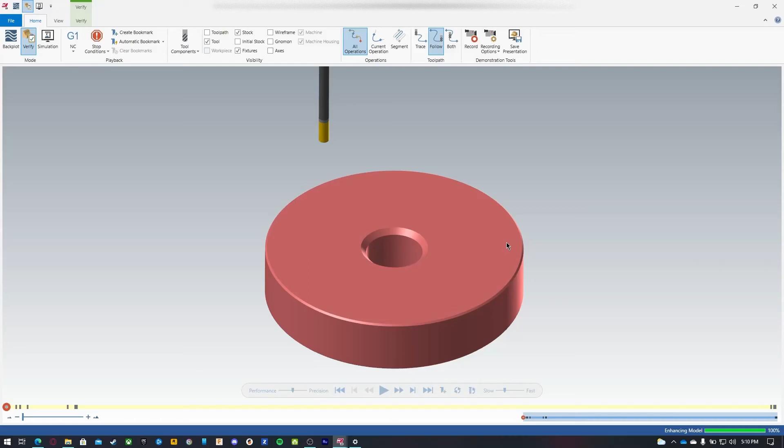I'm going to show you guys how to start out with a solid blank of pre-machined material. We'll do some Transform Toolpaths and some thread milling, so stay tuned.

Let's go up to our wireframe, and I'm going to select a circle endpoint. My diameter will be 4.75, and I'll press enter. Then I'll just press O, or you can click up to auto cursor and click origin.

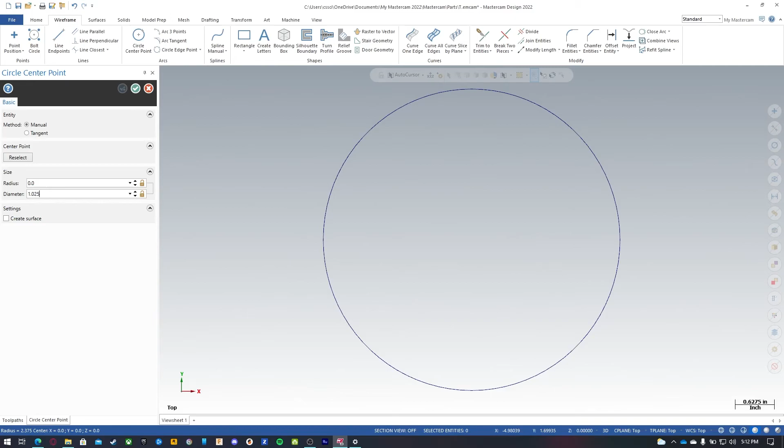My next hole I'm going to build will be for a 1 inch, 1 1/8-12 UNF thread. So I'm going to punch in 1.025, press O again to get that to center, and click OK.

So now I have my blanks for my material. I'm going to go up to solids and click on extrude, and select both of these circles. I want to extrude this so that it's 1 inch exactly, but I want to make sure it's below the Z level.

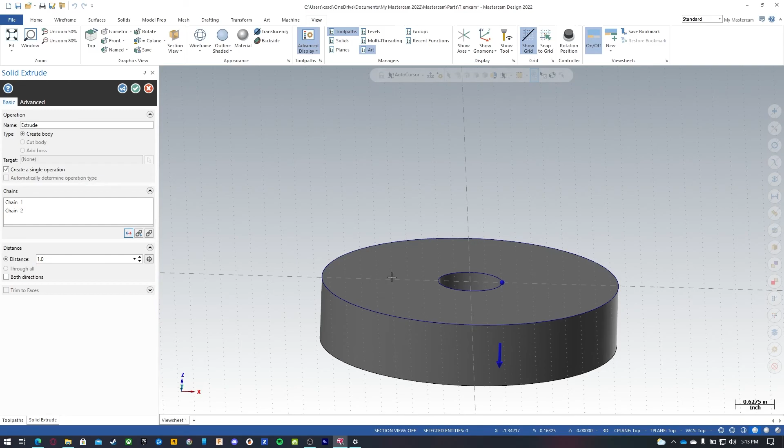So I'll go to view and put on show grid. This is showing that it's above it, so I'm going to click on this reverse all button. Now everything comes off of Z0. Click OK, and I want to throw on some chamfers on this.

So we'll go back to solids, go to one distance chamfer, and I'm going to uncheck these two boxes, so now the only one selected is edge. I'll click on these two edges, and we're going to set these at 0.0313.

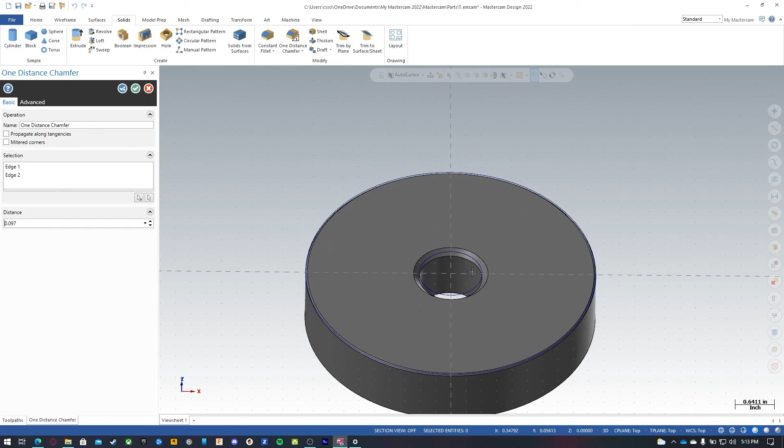I'm going to create a new operation and do the inside bores. These are going to be 97 thou. Now I'll click OK. And if I wanted to hide these, I could put them on a different level.

So let's go to View and go to our Levels button. Now I have my Levels tab for down here, this Levels Manager. I'm going to name this Solid, and then I'll create a new level, and this will be Solid Geometry.

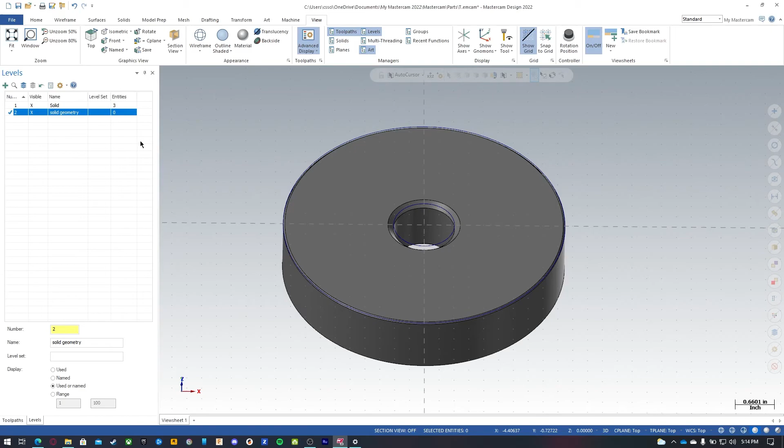Now I'll click on these two lines or wireframe, then right click, and down here it says change level. I'll click on that and click on move. Now I can highlight only my solid, and that geometry is hidden for using later.

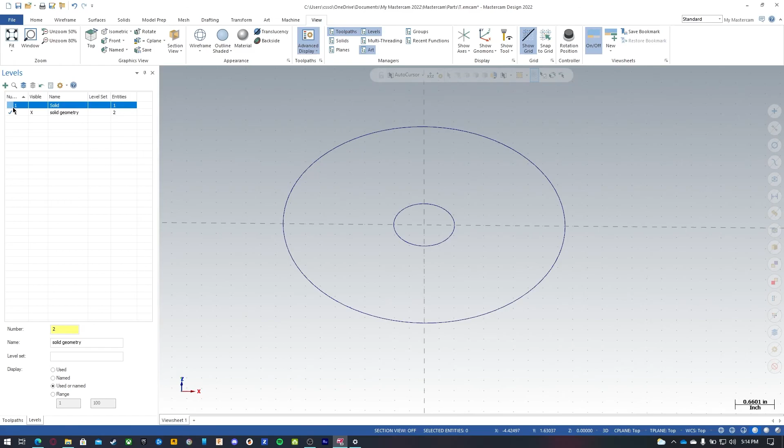You can also have both showing and click on your solid and then go to hide or unhide, and that will hide anything that's unselected. I'm also going to create a new tool level where I'm going to call this wireframe, top wireframe.

Now let's go back to our Toolpaths tab, and we don't have anything in here. So I'll go up to my machine and select Mill Default. I'm going to click on Stock Setup.

I want to click on my solid mesh, and I'll select the new solid we've created. So now this allows me to use this as my stock, since it's already pre-machined on the lathe.

I'll go back into tool settings, and I want to make sure that my assign tool number sequentially and warn of duplicate tools are available. Now I want to create my top wireframe geometry.

I'll go up to my top view, and I can hide my wireframe or my solid. I'm going to use only my top wireframe, and you can see how these X's will show. The active level is going to be the one that has a check mark, so I'm going to unselect those.

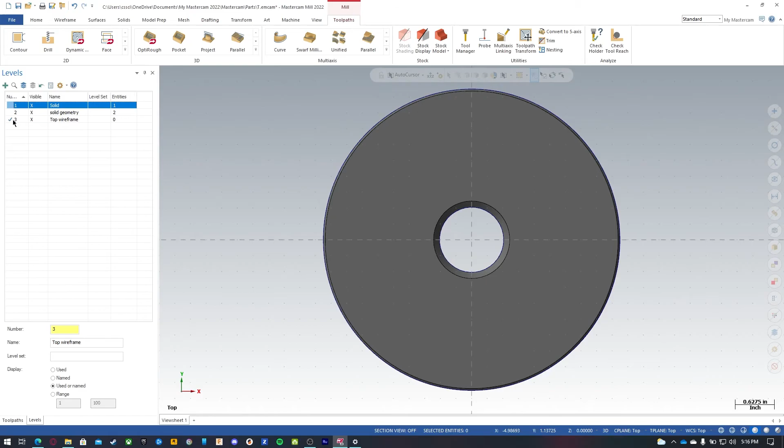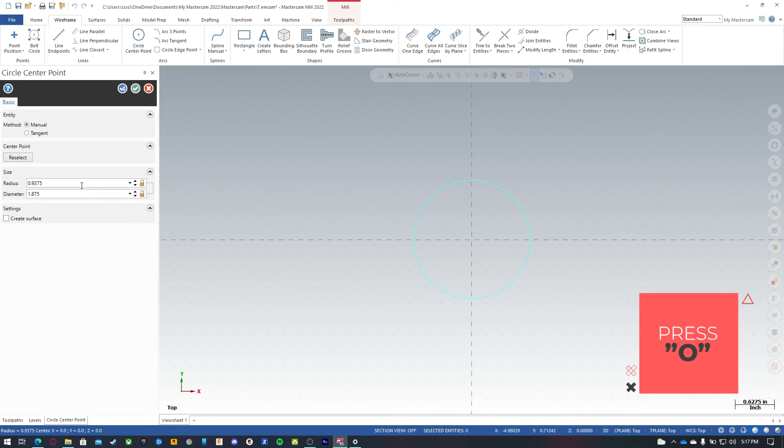I'm going to go to my toolpaths, and let's start creating our wireframe. First thing I want to do is specify a radius of 0.9375, and I'm going to put that on the origin. Create another one, 1.4375, put that on the origin as well.

Now everything is going to be working off center, and 1.9375 will be our origin once again. These are going to be 1/4 tapped holes, so I'll specify them as 0.25.

And I'm going to lock this button, so now it constrains it. Now I want to try and click on these lines, except it's not going to select.

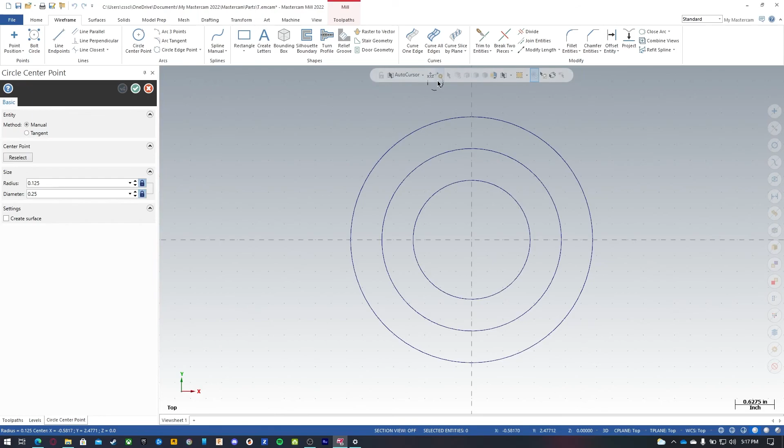So what you can do is click on your selection settings and pick the quadrant option, then click OK. Now it'll ask you if you want to save, and now I should be able to select each quadrant. Now I want to put one on each of these, and I'll click OK.

Let's click on the Transform tab. Now I want to move some of these circles, so I'm going to go up to Rotate, and I'm going to select this one only.

Now I want to set this at 18 degrees, and I'm going to increase this by 1, 2, and 3. Okay, now I'm going to move this, so that gets rid of the one that I had prior.

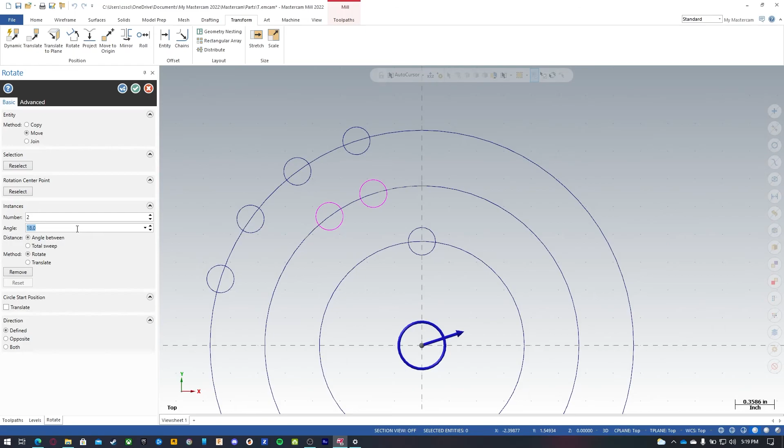I'm going to click OK, select the next one and do my end selection. I'm going to select 2, and these will be 30 degrees. Click OK, end selection, and do another one: select 1, and this will be 45 degrees. Now I have all my holes set in this quadrant.

We're going to have 4 holes, or 4 sets of holes all the way around, but we'll use a Transform Toolpath, so we're only going to do 1 quadrant. I want to build a slot on this section here.

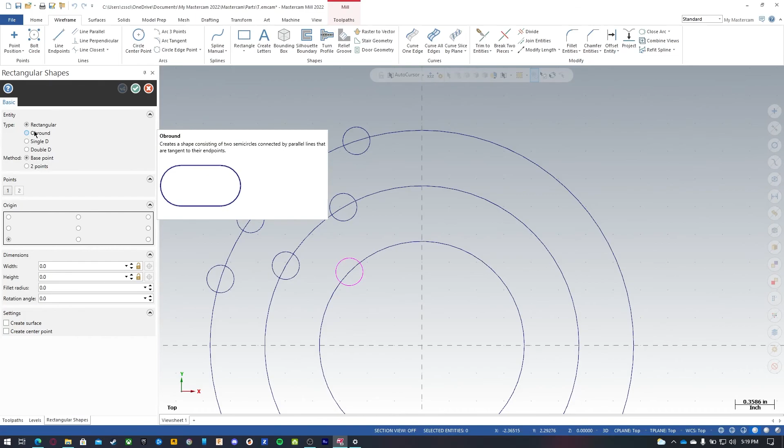So let's go back up to wireframe, and I'm going to click this little drop down below rectangle and click rectangular shapes. Now I can select obround, rectangular. There's many different options here, but the one that I want is obround.

I'm going to click on this top, actually let's click on the middle one here. This is going to be the anchor point of where it drags. You click and you drag from that point, except I want the center of that slot over top. So I'm going to click on the middle one and drag it out.

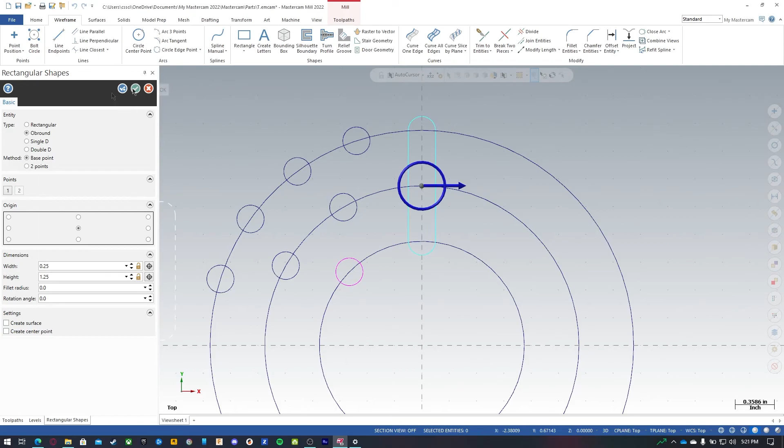You can see we haven't specified any options here, but I want this at 0.25 wide, and I want to have this 1 inch, but I also want to add a 1/4 inch, so 1/8 of an inch per side. So plus 0.25, and now you can see it spans over top. Now click OK, and that is my new slot.

So now I want to create some center drilling operations, but we're going to use a spot drill. Let's go up to our toolpaths, go up to Tool Manager, and let's create a bunch of tools here. What you select as your filter will appear down here. This is your library. What you can do is create tools and store them, and everything that you have here is stored for this particular job.

So I'm going to create a new tool in my library here. I'm going to create a spot drill. It's going to be a 90-degree spot drill, and we're going to do 375, so 3/8 spot drill, and we can specify our feeds and speeds here. Now I'm going to say that this is an aluminum blank that's ready to go. 0.375 divided by 150, we get a chip load per tooth and a feed rate of 61.

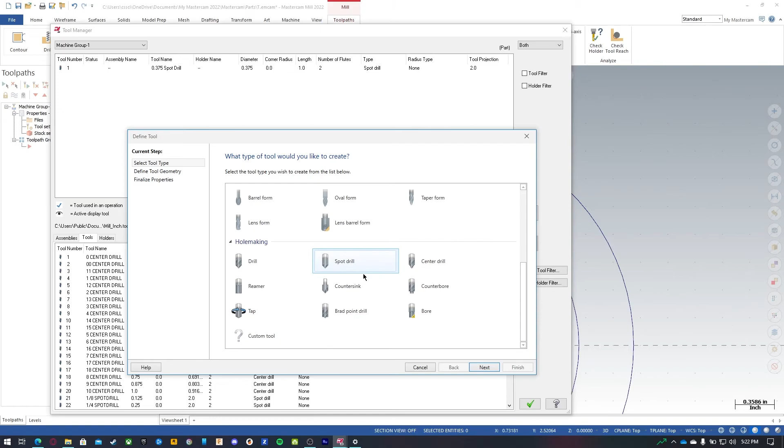I think most of these options are good, so I'll finish, and I'm going to create a new tool, and I'm going to find a drill. I'm going to change this to 0.201, that's the tap drill size for a 1/4 20 tap.

We can go to Next and set our feeds and speeds here, 0.201 divided by 150. Everything else looks good. Create a new tool.

I'm going to use a flat end mill. We're going to call this a 1/2 inch. Click Next, and we'll specify 1200 surface feet per minute again. 0.5 divided by 150, we have a feed per tooth, 4 flutes, and we'll click Finish.

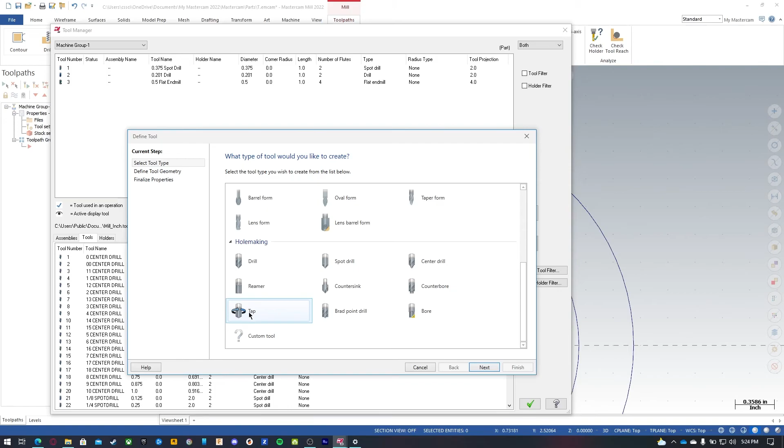Okay, so we're going to go down to Tap, click Next, and we're going to set this at a 1/4. You can also click these drop downs if you're not sure or remember the size of the drills or anything like that. So we're going to go 1/4. You can specify if it's a left-handed tap, but this is going to be a right-handed tap, and we'll use a plug.

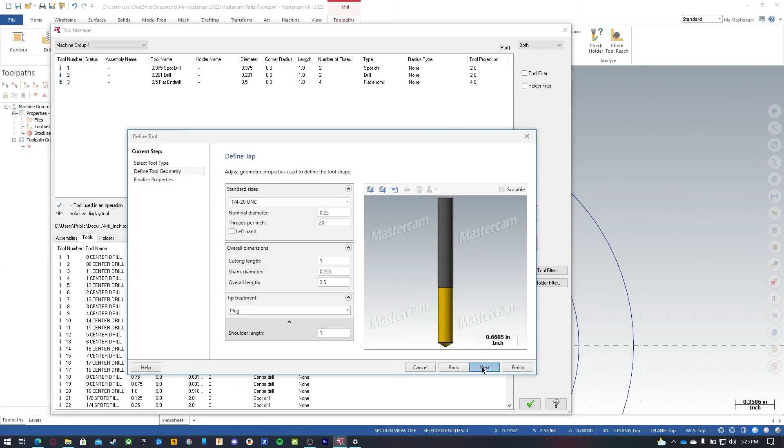So I wouldn't go much more than 500 RPM with the tap. The reason being is you need to have at least 3 times your pitch in order to accelerate and decelerate on older machines. Now this being 500 RPM will be able to slow down in enough time that it's not going to hit the bottom of the hole. But these are through holes, so we don't really have to worry about that much, but just make sure you're not going like 10,000 RPM.

So click OK. The next tool I want to create is going to be a thread mill, so that's right here. I want to create a unified national. There's going to be 12 threads per inch. The outside diameter is going to be 0.745.

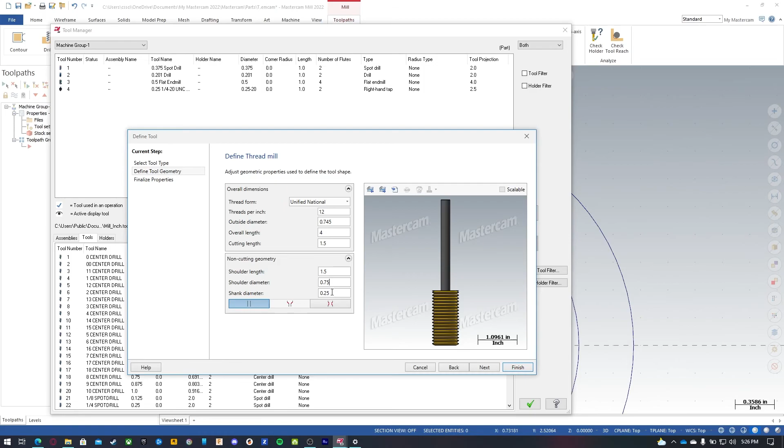Our overall length, we can specify this at 4 inches. The cutting length will be 1.5. Shoulder length can be 1.5. Shoulder diameter will be 0.75. Our shank diameter will be 0.25. So it's going to look like this.

We'll click Next, and we're going to specify our surface feet per minute at 1200. So we're doing aluminum, and our feed per tooth.

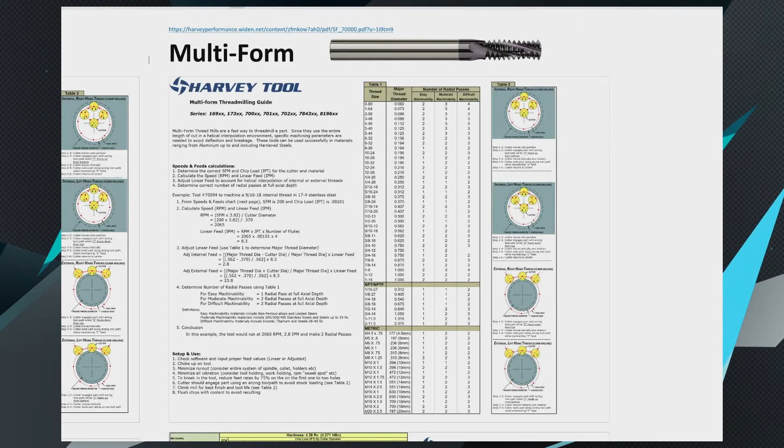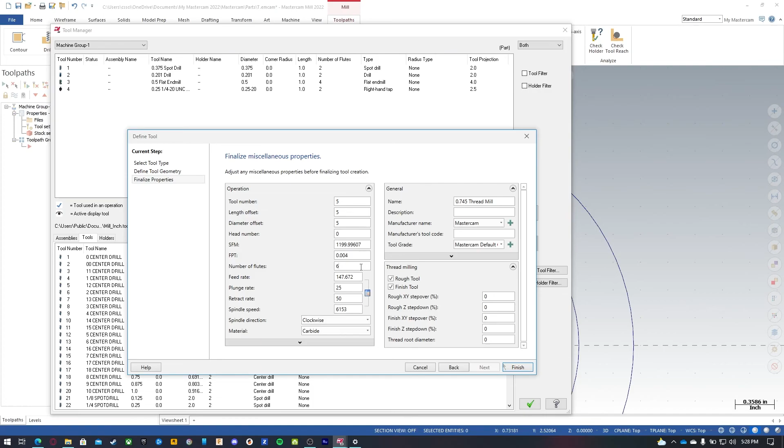Let's click Finish, we're going to create one more tool. We need a flat end mill, and we have to do that 1/4 inch slot, so we're going to set this at 3/16, so 0.1875.

And we don't want any corners. We're going to specify that this is carbide at 1200, and my feed per tooth, 4 flutes—sometimes you might have 2 flutes. Click Finish, and we are done setting up our tool.

So let's click OK. Now, first thing I want to do is maybe spot drill all of these holes. So if I go up to 2D, you can go to Expand Gallery to see more options, but I'm just going to go to Drill.

And I'm going to select these holes, and now you see how that has selected a quadrant. We might want to go back into these options and then press the Delete key to get rid of that.

Okay, so now we have sorting options as well. We can click the selected order, or we can specify zigzag. Doesn't much matter, it's not going to be crossing a whole lot of things. It might come in handy when you're trying to jump over a wall.

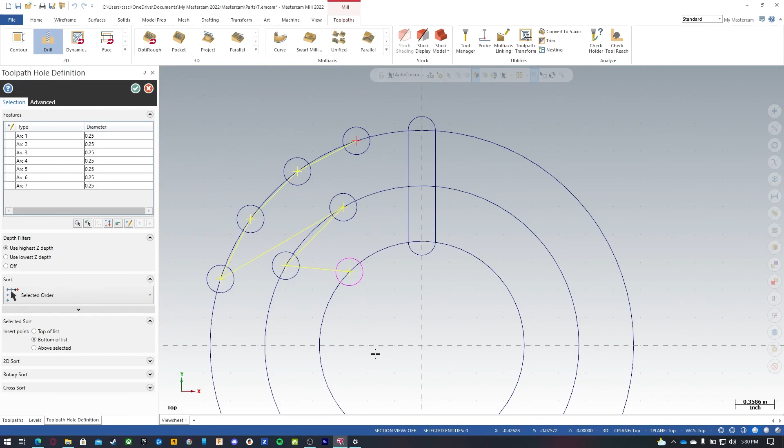So whenever this is picked, or you can even do a window selection, so if I wanted to click and drag, I can have my points selected in the selected order. So I'll click OK.

And I'll go to my tool, and let's select the 3/8 spot drill. We have a spindle speed.

Now this is dependent on your machine. But I'm going to go down to my cut parameters, and I want to drill and countersink these holes in one shot, so I'm going to leave this on drill counterbore, and I'm going to add a dwell.

I believe this is in milliseconds. I'm going to go to linking parameters. I'm going to set my height to 2 inches, absolute.

I can use my clearance at the top, start and end of the operation, and this just allows me not to retract up 2 inches in between each hole. It just does it on the first and the last one.

My retract, I'm going to specify at 0.1. My top of stock is 0 because this is already machined. And my depth—now I'm going to set this at absolute, and I want a finish diameter of 0.375. So I'm just going to click OK.

So that is the total width of my spot drill. Now I can lower it by 1 thou or whatever just to get it accommodated, or use a larger spot drill.

I'm just going to check my planes, make sure it's all set to top, and then make sure I have my coolant set on. And I like to save my parameters so that I don't have to set these options again. They're all fairly close to the defaults.

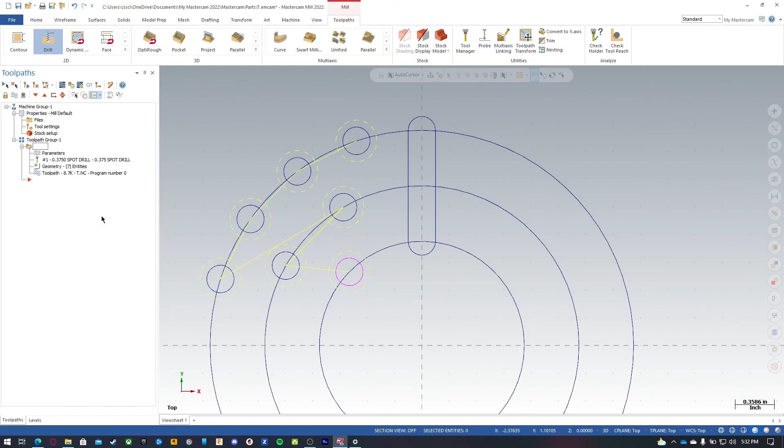Now I want to drill out these holes, so I can just copy and paste this operation. And if I also want to set my comments in here, I can go back into Tool, which we have to go to anyways to select our drill. And we'll make sure that it uses the right feeds and speeds.

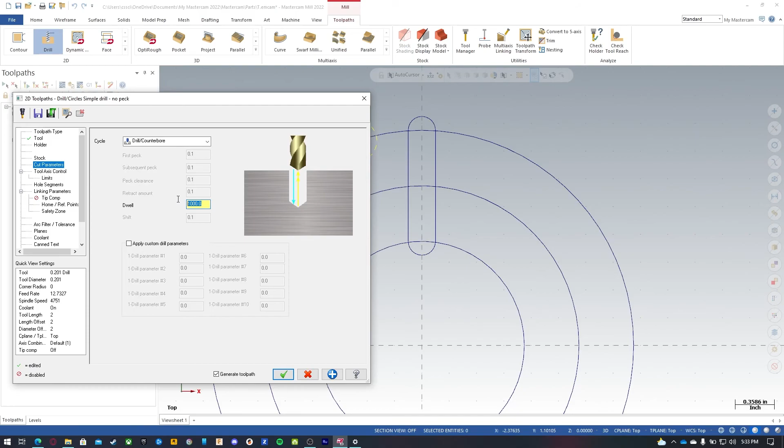I'll go to my cut parameters, and we're just going to drill right through, but we don't need a dwell, so we'll turn that off.

We'll go to linking parameters, and I want to specify the depth of my hole. So I know that this piece is going to be 1 inch exactly, so minus 1 inch. Now I like to have a little bit of breakthrough, so I also put in minus 0.05.

And I also have a tip comp, so this is going to be tool 1. That will give you the actual tool tip length, or the point. So then I should be alright to click OK.

Now if you wanted to verify, you click backplot here, and I'll go to my backplot, and it shows me that I'm drilling in and I have a bit of a chamfer, which is great.

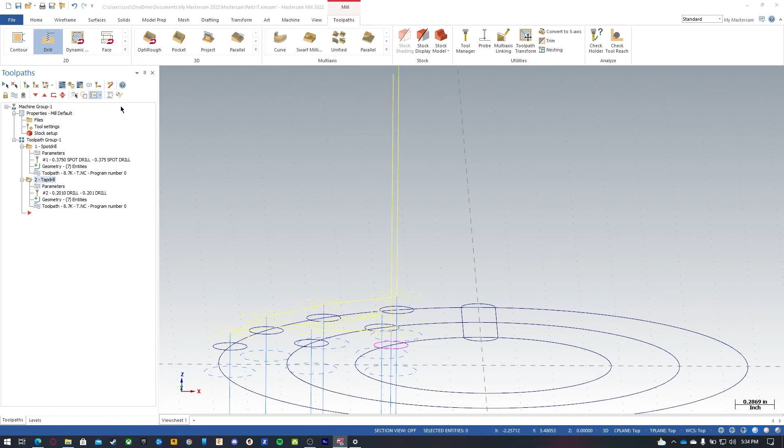Okay, now I'm going to hit escape and go to my tap drill and check the depth of this drill. Now it also says that this is my total depth down here, so I'm going 1.104.

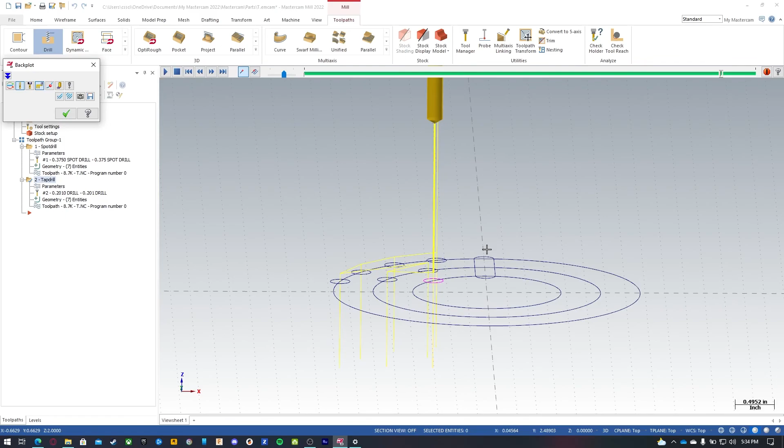Okay, and then it's rapiding over, and it's not doing a full retract into the very last hole, and then it's done. So those look good. We've got our spot drill and our tap drill done.

Now we just need to tap them. So I can just copy this once again and paste it. I'm going to go up to my tool and select my tap.

1/4-20. We're going to specify this at 500 spindle speed, so not surface feet per minute. We have a feed per tooth of 50 thou, that's our pitch. So we're just going to tap this, and we'll go up to cut parameters and specify our tap function.

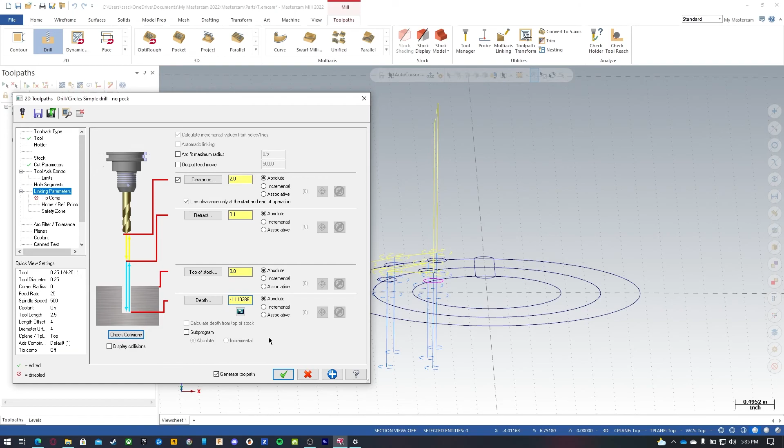Now our linking parameters, typically we can just go about the same as the drill because the point is going to be compensated as well, or if you wanted to go a little bit deeper, that's fine as well. I'll just leave it as is. So click OK, and now we've got a tap.

So now if I wanted to backplot this, I would be able to see my tap, my drill, and my spot drill. So I'll back it up, and I'll turn on my stop conditions.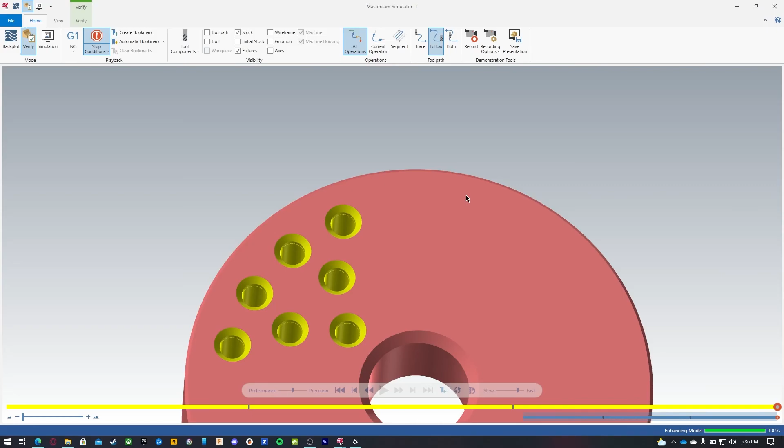Now I'm going to spot drill, and tap. And that gives me my chamfer in the one shot, which is awesome. I'm going to click close, and with this, I'm going to do my slot now.

So I probably want to go into contour, and I'm going to select this chain at the base over here. If I select it over here, it's going to go the incorrect direction if I wanted to climb mill. So I'm going to, if I press R on the keyboard or press this button, it will reverse it so it climb mills.

But I want to have it arc in at the middle of that line, so I want to have my base point selected like that. I'll click OK. I'm going to go to my tool and my 3/16 flat end mill.

So if you have a 24,000 RPM spindle, that would work. If it caps out, make sure you drop your feed rate. So let's say if you capped out at 6,000 on a certain machine, you would have to back your feed rate down. Otherwise, you're going to end up breaking your tool.

This is going to ramp the slot. Go to our cut parameters, and I'll specify ramp. I'm going to do a depth, and make sure my pass is at the final depth. And I want to go maybe, let's go 0.093, so that's half the diameter of the cutter.

So if we're slotting, I like to turn off linearized helix because it doesn't work all that great on older machines. It spits out too many points and then it starts to jitter. So if you have a newer machine and it does points very well, linearized helix is pretty decent.

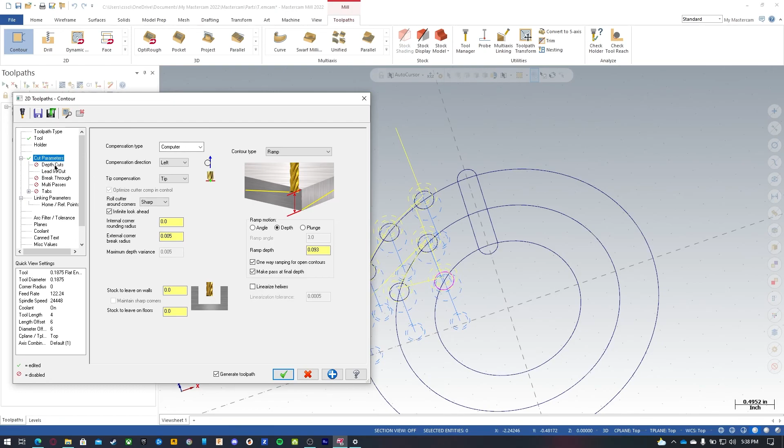I'm going to leave depth of cut off, turn my lead in, lead out to probably 10% on both, and then copy the options over to the other side. I'll go to my linking parameters, and I want to specify my total depth at minus 0.437. So I'm going to click OK, and let's take a look at this.

So it's going to ramp it out and do a final pass at the bottom.

So now that we've got those tool paths done, I want to copy them around 360 degrees. So what I can do is make sure you have these check marks on each. So if I just click on Toolpath Group, now I can just right click and go to Mill Toolpaths and click Transform, or I can go up to here and click Transform Toolpath.

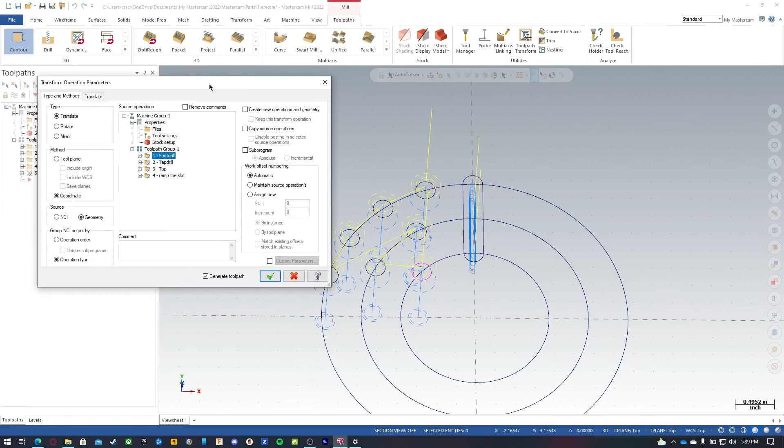Now I want to rotate these around the center. I want to have all of these operations selected, and this group NCI output by operation order, this is going to spit out a center drill, then a drill, then a tap, then a slot, and it'll do the same in that order on each quadrant. So that's a lot of tool changes. But if we do it by operation type, then that will do center drill all the way around, then drill all the way around.

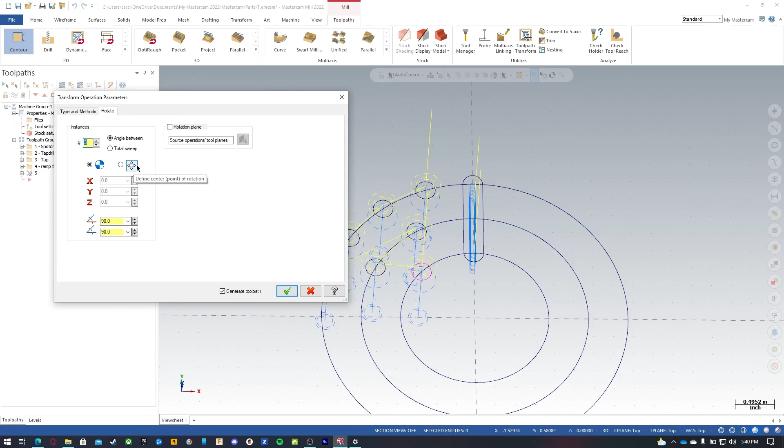So I'll click on rotate. I have my origin already selected, but you can change it here. I'm going to do an angle between, and I want to do 4 angles of 90 degrees. I'll click OK and generate my toolpath. Now if I have my button here selected, only display selected toolpaths, I click on this one, it shows me that I'm going around all the way.

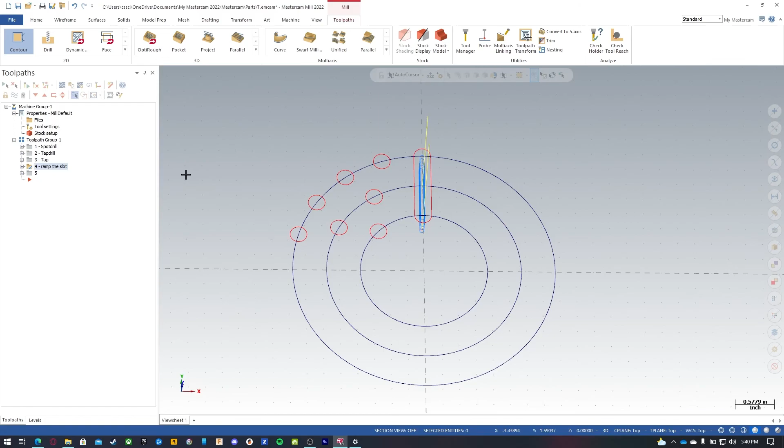Now if I select on these, this shows me that I have just those ones selected. You can do a couple of different options: specify only 3 rotations and use the existing operations, or maybe ghost them. And then I like to put them in a folder, so new toolpath group, don't post, and then I'll take these and put them in here.

We'll regenerate. So then when I go up to my back plot, it does all of the operations. It spot drills all the way around, drills all the way around, goes and taps, and then it slots out. Now I might want to also do a countersink on my slot here.

So what I'll do is I'll create a new contour program. I'll select the same contour, and I'm going to select my tool, my 3/8 spot drill, call this chamfer the slot. I'll put this at like 40 inches a minute.

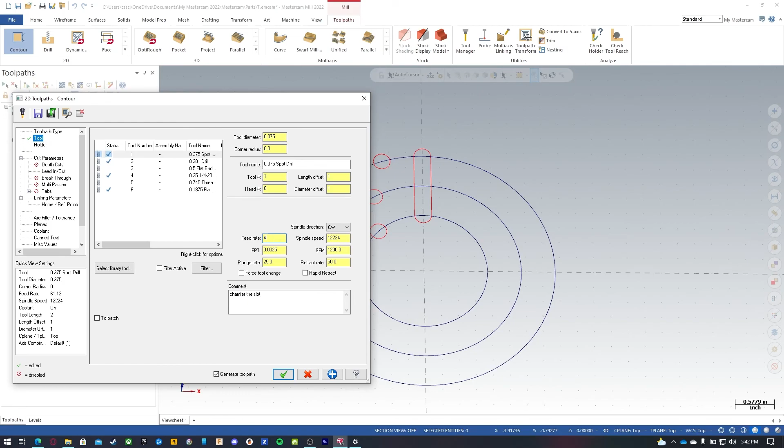And I will change this to 2D chamfer. I'm going to put this at 0.0313, with a bottom offset of 100 thou. You can specify it at 50 thou if you really wanted, but this should be sufficient enough. I'm going to make sure I've got 10% lead in, and my depth is going to be 0. So this is going to show me that my lead in and lead out is not going to violate anything.

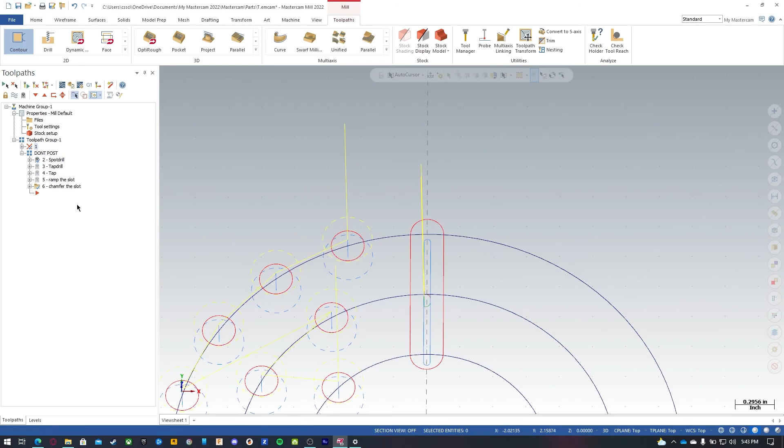And now if I wanted to, I would put this at the bottom. You just click and drag it, so let's say if I wanted the spot drill, well, I don't want it at the bottom, I want it at the top. So I would hold it and drag it to the spot right above it. Okay, so regenerate, and I'm going to add my parameters, and add this. So we're going to close the don't post and verify it. So I have my spot drills, my drills, tap, slot, and then we got our chamfer.

So I'll name this top side, and I have to create some lines on this part. So I'm just going to select contour, and I'm going to select these circles just like that. Click OK.

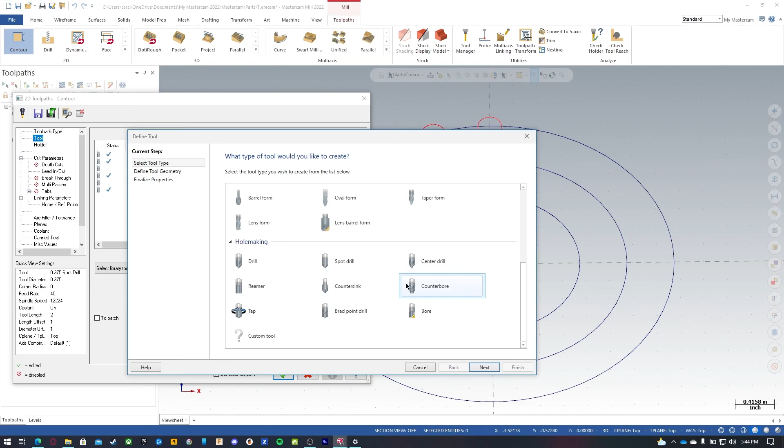And I need one more tool, so I'm going to go to Create Tool, and I'm going to pick a spot drill. We're going to call it 90 degrees, and we'll do 1/8. We'll click Next, set our surf speed, and we're going to click Finish.

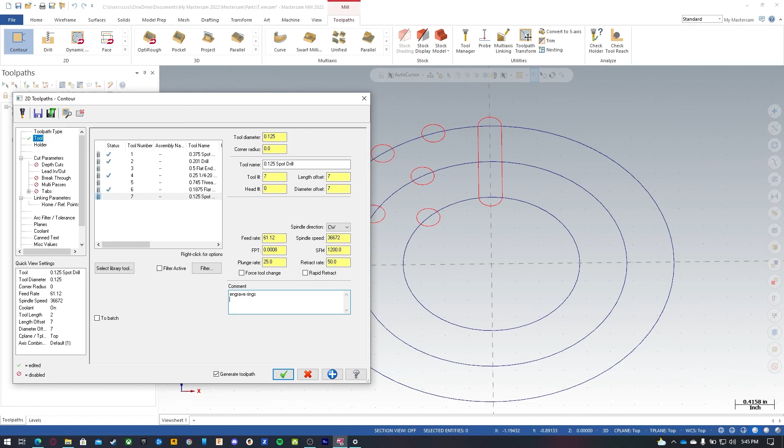So this is going to engrave rings. I'll go to my cut parameters, and I want to set this to 2D, and I want to turn my compensation off so that it will engrave directly down the center of those rings. I'm going to set my depth at -0.01, so we're going in 10 thou.

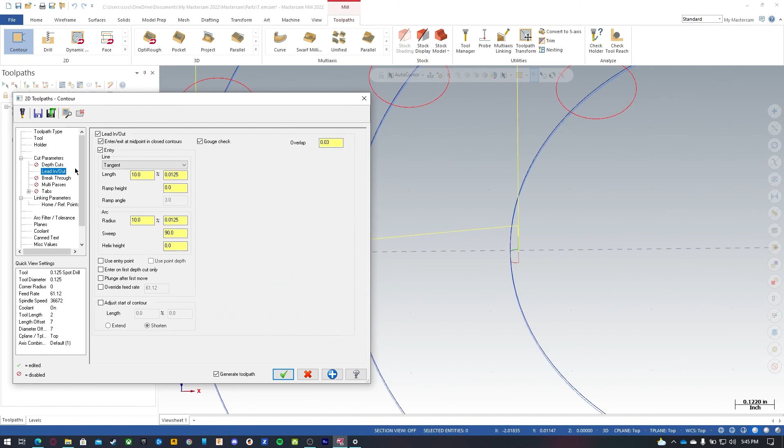So click OK. And you see there's lead in and lead outs? That's going to affect what it's going to look like. So let's go back in and turn off our lead in and lead out. If we just turn that off, click OK, now it's not going to escape our lines. So now we'll post it, and we'll just zip right through, and there's our lines. So now we're done, so we'll just click OK.

And we're going to create a new toolpath group. I like to click on machine group so then it doesn't go inside of top group. So this is going to be bottom side. And I want to go to my view, and I want to open up my planes. I'm going to right click on my top plane and duplicate it, and we're going to call this bottom side.

Now I want to drop this by 1 inch exactly. And I also want to rotate incrementally either the X or the Y, it doesn't matter, because this is a round part. And I want to have it so that my Z is pointing downwards. So click OK, and then click this equals button to get everything to where it needs to be.

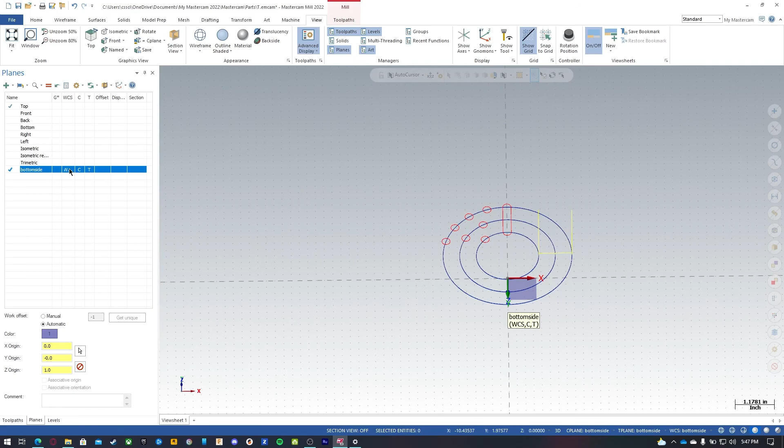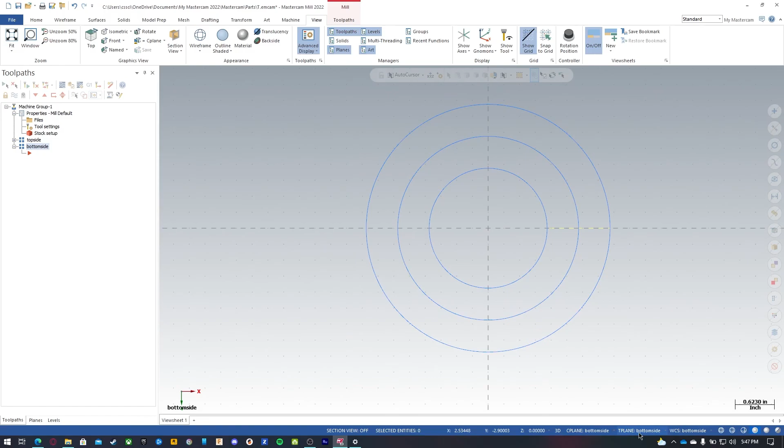So now if I go to my toolpaths, we are ready to do the toolpaths for the bottom side. I'm going to go into my planes and levels and do another level, and this will be bottom wireframe. I'll disable my top wireframe and go back to my toolpaths, and right click and go to top. Now as long as these are set to bottom side, you will be in the right spot. And I'm going to turn off these toolpaths.

Now I want to create the inside pocket of this base plate. So I'll go up to my wireframe, click on circle center point, and punch in 4.375 and press O. Click OK, set my 1.5 circle, and then press O. So now I have these two circles, and this is going to be used for my pocket.

So what we've done is we've taken our part, finished the top side, and flipped it over, and now we're going to rough out and finish. So let's go to our toolpaths, and we'll do dynamic milling.

Now I want to do from stay inside, so that'll stay within this region, and I'm going to put an avoidance region here, and my machining region here. So now if I click on preview chains, it shows me this donut of where it's going to machine, and that's exactly what I want, so I'll click OK.

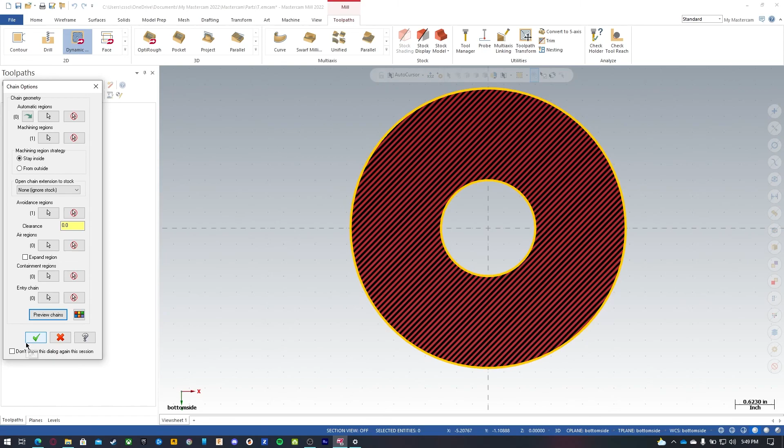And we're going to go to our tool and select our 1/2 inch flat, and we're going to rough the pocket. So then we'll go to our cut parameters, and we're going to climb mill, and we're going to do a step over distance of 10%.

Minimum toolpath radius 10%, and we're going to keep this down within 300%. We'll leave, let's say, 10 thou on the floor and 50 thou on the walls. And then I'll turn off my micro lift distance and we're going to go 200 inches.

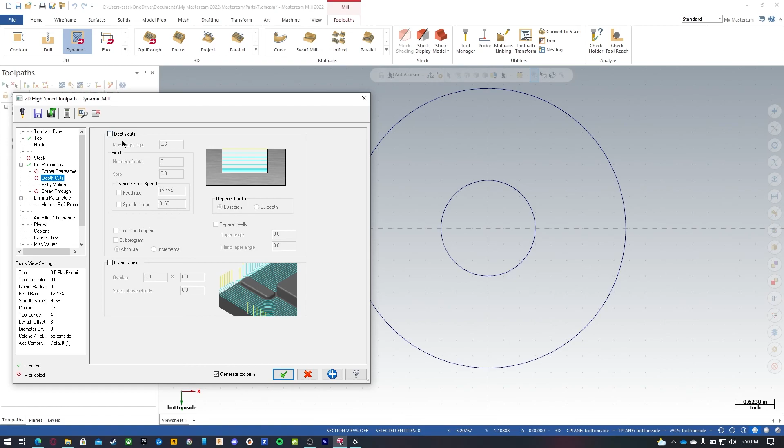Now let's go to our depth cuts. We'll turn that off. We'll go to entry motion and we're going to helix in. We're going to leave this as default.

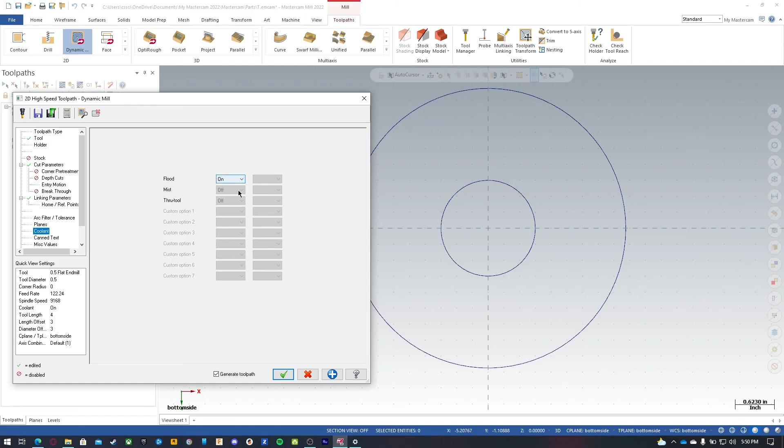We'll go to our linking parameters and I want to specify this at -0.625. Check our planes, make sure it's set to bottom side and make sure coolant is on. And now we should have a toolpath generated.

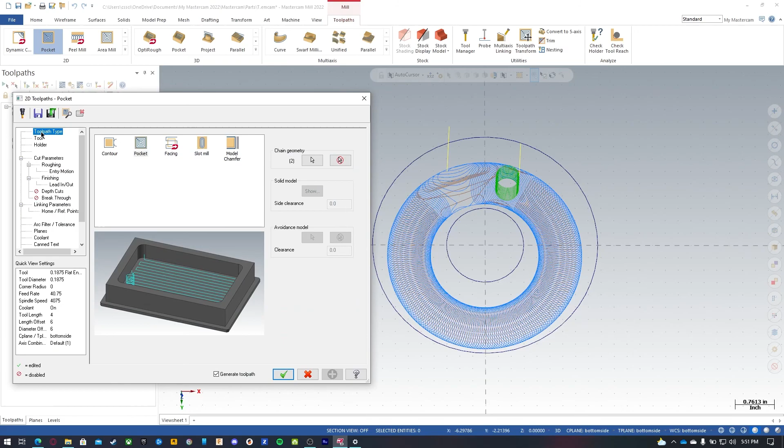So now we've got this toolpath that opens up and clears out the stock that way. So now I want to create a finish pocketing program, and I'm going to select these two chains once again. I'll click OK, go to my tool, 1/2 inch flat.

Everything is good. So I'll type in finish pocket, go to my cut parameters, we're going to do a standard, and we're going to turn this to 0. So we're going to leave this on rough, and I'm going to leave my step over percentage at 50%, and I'm going to do spiral outside to inside, so it doesn't throw the chips against the wall and then recut and damage your cutter.

I'm going to turn my entry motion to ramp and change my entry feed rate to feed rate and then auto angle.

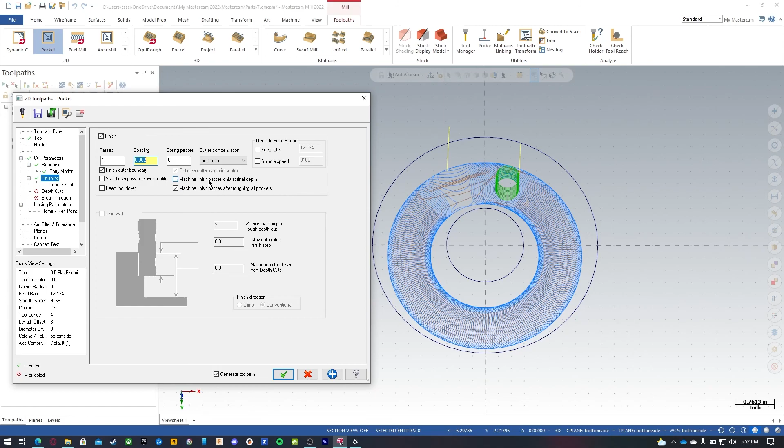Go to my finishing. We'll leave this, let's set this to 2 thou, and we'll finish the passes only at the final depth. And we'll do a lead in and lead out, and those look good. We'll go to linking parameters, and we'll set this to -0.625. All of our other options should be set. And planes and coolant, we're good.

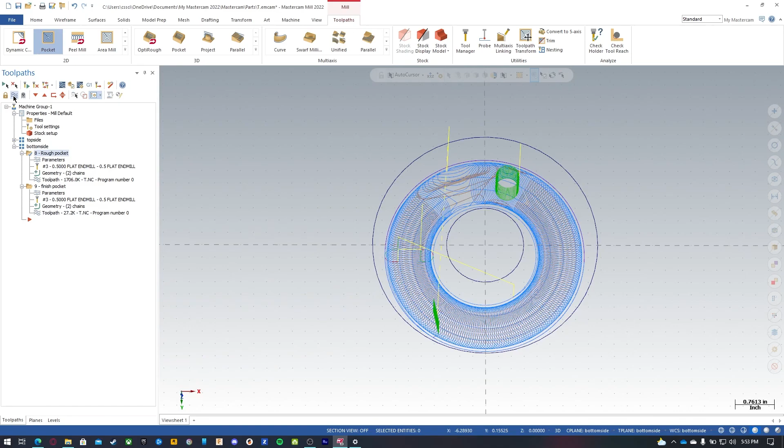So now I'm going to turn off this toolpath, and now this is going to do my finishing pocket on both the inside and the outside.

Now I have my ramping starting way at the top where there's no material, so let's change that. Go to parameters, linking parameters, and we set this at -0.625, and we left 10 thou on the floor, so I just type in the plus 10 thou. So now it only ramps in 10 thou from that stock.

So now that's going to be finished. And I want to make another hole that's going to be my thread mill. But let's chamfer these pockets first.

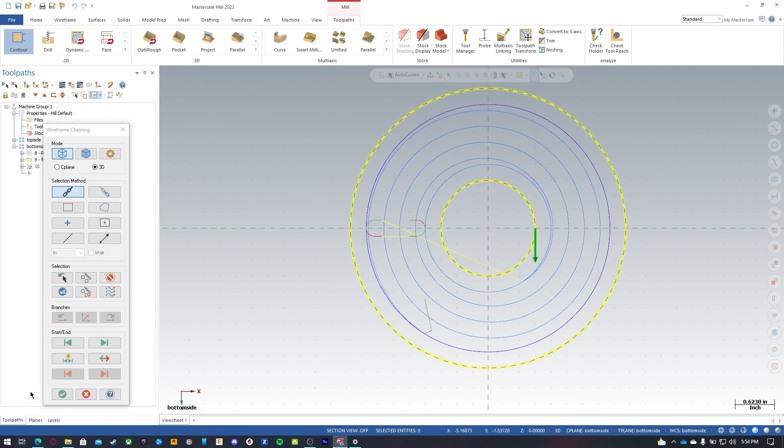So let's go to contour, and I'm going to select this one that way. So on the left hand side of this arrow is going to be where my cutter is. So then I want down here, the left hand side of the arrow is there, so then I get climb milling all the way around. I'll set my tool, this will be a 3/8 spot drill, to chamfer the pocket.

Set this at 40. Go to cut parameters. Change this to 2D chamfer. We're going to leave this at 0.0313. We've got a bottom offset there, and we'll change this to computer or wear, whatever you choose. Just keep it consistent.

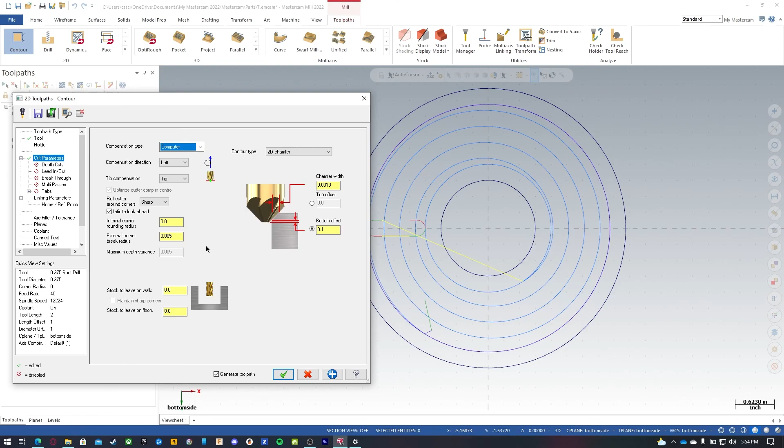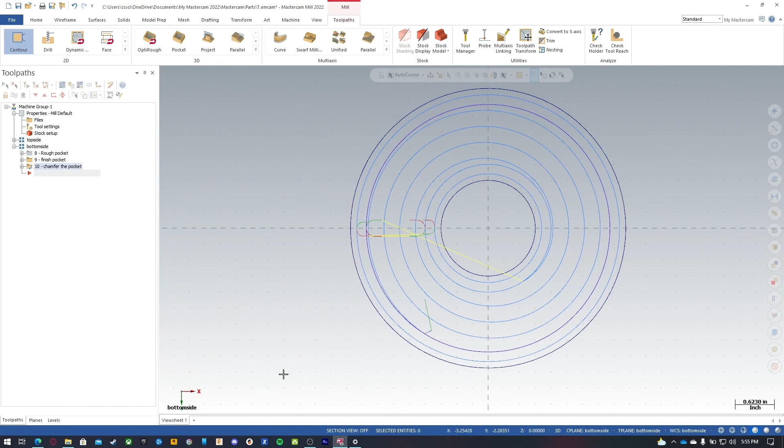My lead in, lead out, I'm going to set this to 25% on both and copy the settings over. Now I'll go to my linking parameters, and this should be set to 0 because it does the math on it and should give you what you need. So I'll click OK, and this now chamfers the remainder of my part.

But if I were to backplot this, I could see we're punching our holes in, so the other side is already complete, and now we do our pocket, finish, and then our chamfer. If you wanted to see what's happening between tools, you can just click on this color loop, and it shows you what's happening with each operation.

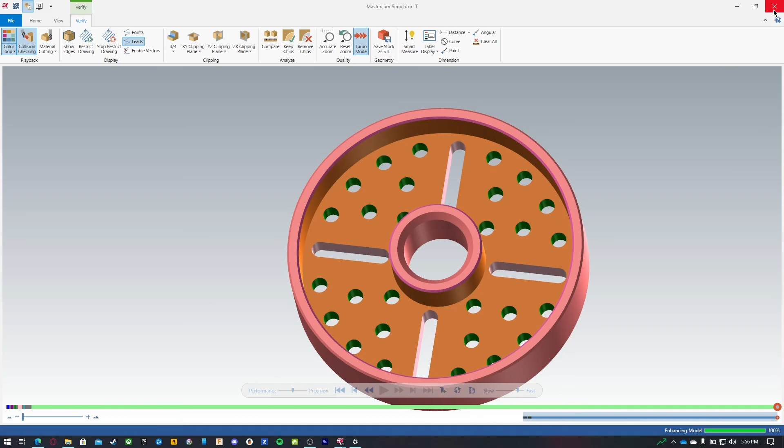Now the only remaining thing is to open up this hole to the right size, and then we need to thread mill it. So let's click close, and let's create a new circle.

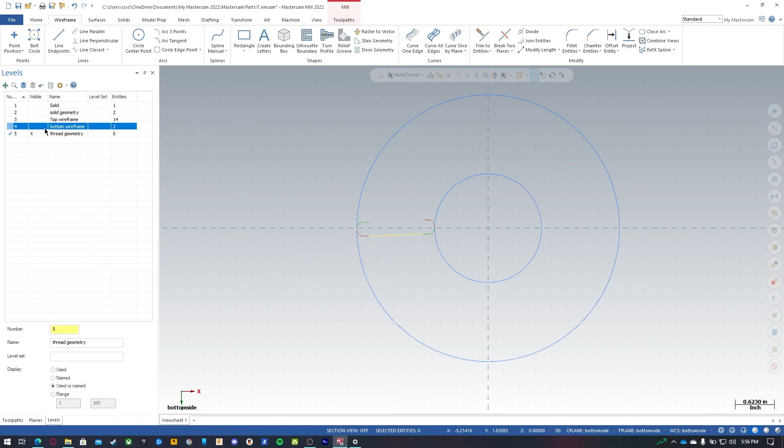Maybe go to levels and do a thread geometry. We'll close our wireframe or disable visibility, and we'll go to our toolpaths, and I want to turn off any remaining toolpaths. So let's go to our circle center point.

Now I have a thread that's 1-1/8-12 UNF. So this is our major diameter. Then we have to do 1/12 to find our pitch, which equals 0.0833. The next step is to find out our straight depth for our thread for internal. So that'd be 0.5413 times our pitch, or divided by the number of threads per inch, would be 12. So we end up with 0.0451.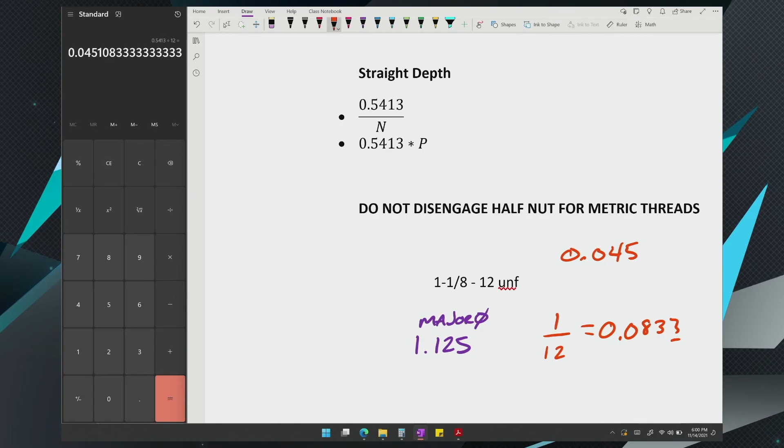So then we have our major diameter, and we subtract 2 times our straight depth, 0.5413 over n. And then we do another bracket and a bracket, and this gives us our minor diameter. So that gives us the innermost circle that we require for our internal thread. So if we multiply 0.045 times 2, we get 90 thou. And then we subtract that from 1.125. So we end up with 1.035, and that'll be our minor diameter.

If we go back to Mastercam, 1.035 will be our minor diameter, and then we have to specify our major diameter, which will be 1.125. So we have to mill this out to the proper size, and we'll just use a contour toolpath.

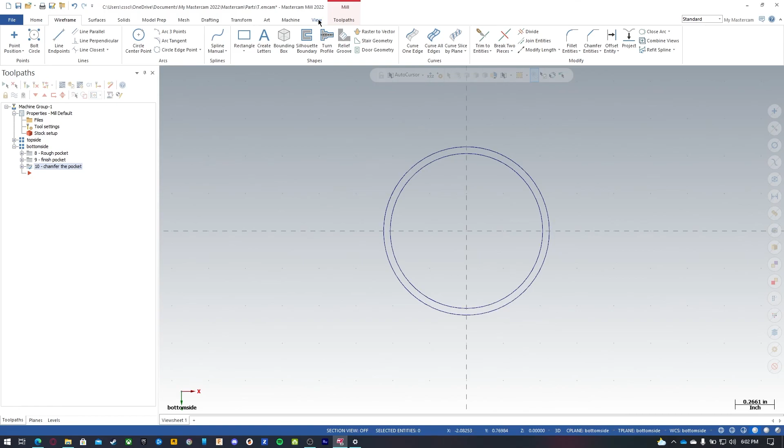So it's already drilled and bored, so it could fit on a mandrel. Now I just want to click on my 1/2 inch flat end mill. We'll finish the minor diameter. We'll change this to 30 inches a minute.

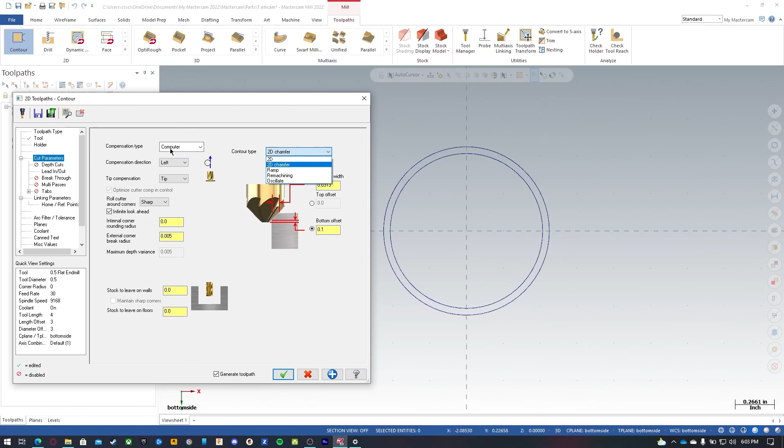We'll go nice and slow, and we're going to set our compensation probably to wear, so you would adjust this on the machine instead of coming back into the software and doing it. We're going to click on lead in, lead out, make sure that's low enough, and then my linking parameters, I want to go a little bit past the thickness, or what you have is a chamfer, so whatever you prefer.

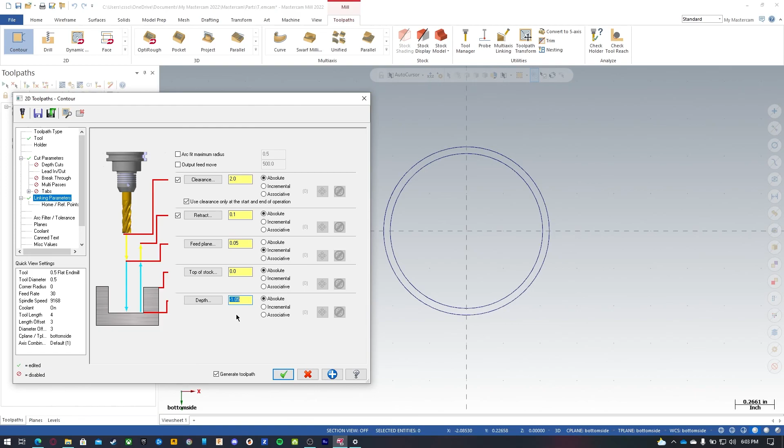Let's just go minus 1.05. That gives the cutter a little bit past the thickness of the part. And we're just going to do one pass because there's not a lot of material there, and it's just going to go around. So that is finished minor diameter.

My next thing I need to do is do my thread milling. So if you just click on that expand gallery button, click on thread mill, and we're going to pick this outer hole, and it specifies your diameter right here. We'll click OK. We'll select our thread mill here.

And might want to possibly drop this down. That's a little bit quick in the hole, but we're going to have to do some calculations with this anyways.

So if you take a look at this sheet here, it gives us feeds and speeds calculations for our thread mill. We would normally calculate our RPM with our surface feet per minute times 3.82 divided by our cutter diameter, which we've already figured out. Then we need to figure out our linear feed rate, calculated with our chip load per tooth, which is 4 thou. We have our number of teeth, we have 6 of them, and we multiply that by our RPM. So we end up with a linear feed rate of 147 inches a minute. But we need to reduce this inside by using the adjust internal feed.

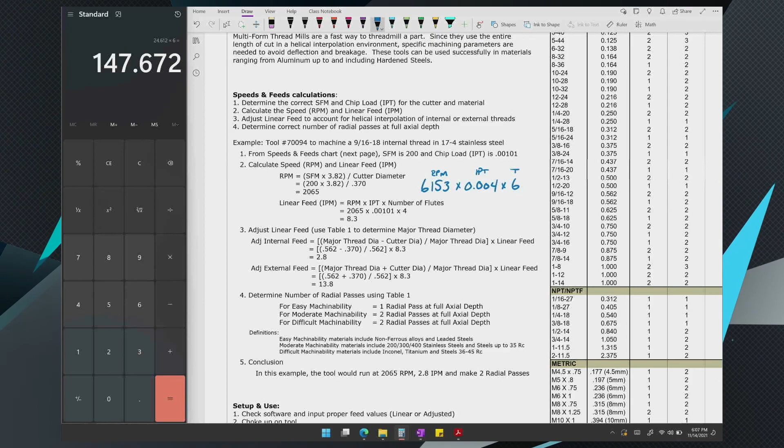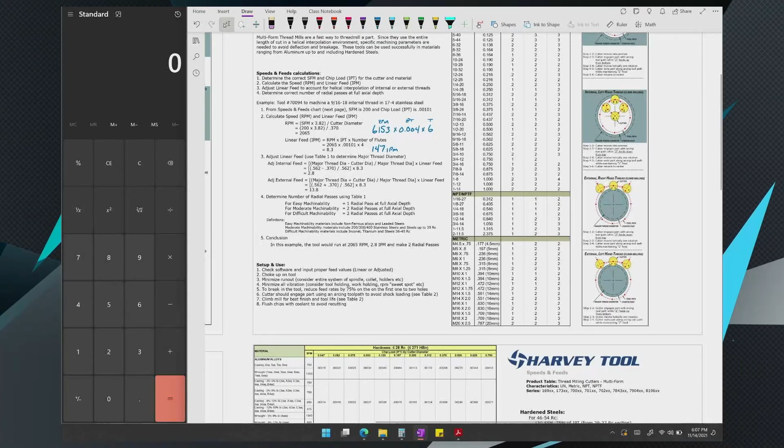The reason we would want to reduce our feed rate inside of a hole is because the top portion of this thread mill, in between the shank and the flutes, is where it's going to be the most brittle. So it will break off at that point if you feed it too fast.

So we'll have to adjust with our internal feed, and we'll use major diameter minus our cutter diameter, then divide that by our major thread diameter, and then take that calculation and multiply it by our linear feed. So 1 1/8 minus our cutter diameter, which is 745, we get 0.38. Then we divide that by our 1.125. So 0.38 divided by 1.125, and then we multiply this by 147, and this will give us 49 inches a minute.

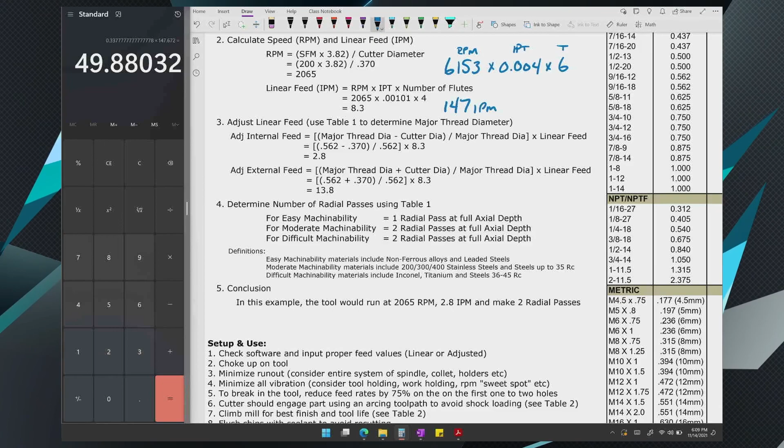And we might as well just round up to 50 inches a minute. So going back to Mastercam, let's change this to 50, because 49.88, we're close enough.

We'll plunge down. Let's go 25. Let's go 50. So we're going to plunge right down into the bottom and then make one full pass around in a circle, and that will cut our thread without having any deflection.

Go to our cut parameters, and we have 18 active teeth. The way we find that is 1.5 divided by our pitch.

So we've got our thread start angle here. We can have it start at 0 degrees or 90 degrees, whichever you prefer. I'll leave it at the default. We have our overcut, which allows us to arc in. And then we have our taper angle, which we can cut NPT or British pipe threads with a standard thread mill.

Compensation type, typically you want to have wear on, so you can offset this until you get your gauge to fit. You would set your ID thread for this one in particular, and we're going to leave those, and this will be a right-handed thread.

We're going to go bottom to top. Make sure you do climb milling because it will change. The reason why we want climb milling is because the first couple of teeth tend to break off and wear out the most because they're doing all the cutting, and then everything goes and follows, and you would have to tap it again.

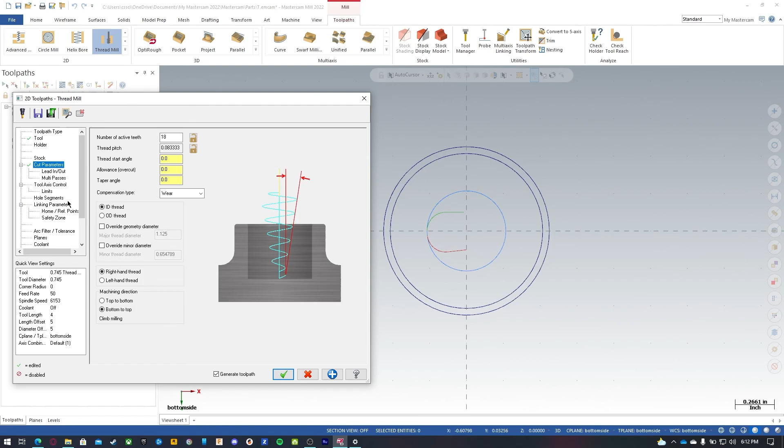We're going to go here to lead in and lead out, and I believe everything should be fine. We're going to go to multi-passes, and we're going to take one roughing pass. Our height is only 45 thou, so we could probably do a step over of 25 or 30 thou, but you just want to make sure you're not going to break that thread mill.

So let's go do a little conservative pass here, and then we'll have 2 finish passes, and we'll set them at 0. You can do spring passes. I haven't had much luck with this, but using finish passes seems to work for me. So we can override the feed speed for doing our finish pass if we wanted to.

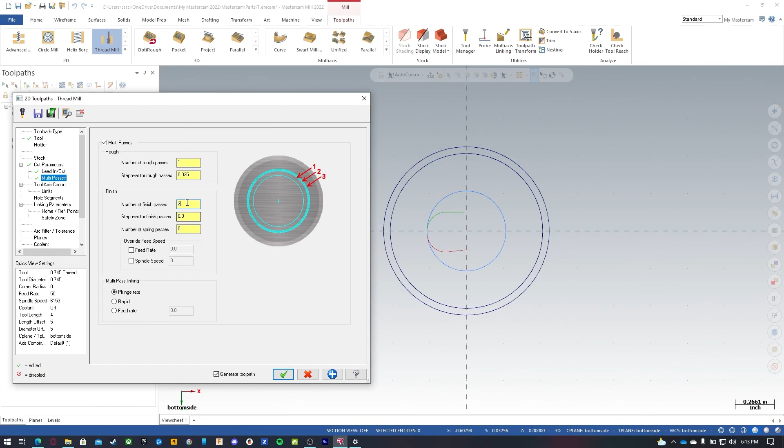And we have multi-pass linking where we can plunge or rapid or feed, and that's just in between each pass. We should be okay with plunge rate because we set that at 50. So we just want linking parameters, and we'll set this at 2 inches absolute.

100 thou above, 50 thou above, the top of the thread is 0, and the bottom of our thread, well, we're going to go right through the hole. So we have a 1.5 inch long threaded section on that thread mill, so I'm going to go at least 2 pitch just to make sure it engages all the way.

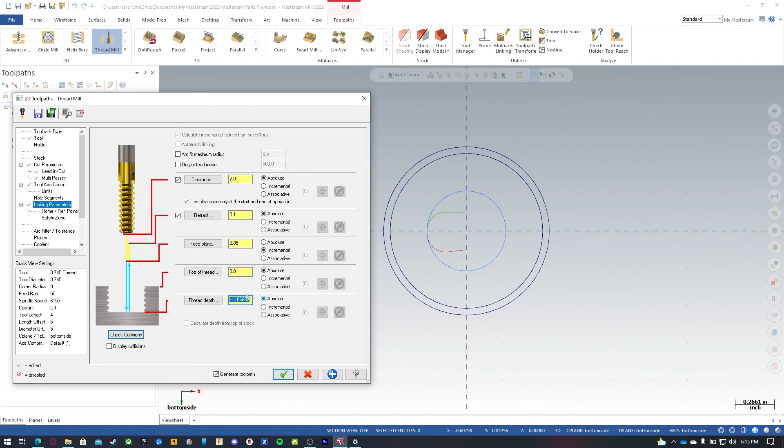So -1, and then we can subtract 2 times 1/12 in brackets, with an asterisk in there, and we end up going 1.167. So then we'll check our planes, and everything's good.

We'll go to coolant, change that, and I'm going to turn off my finish pass. This thread mill makes one pass, and then it starts again at the center and makes another pass, so it ends up doing 3 total passes.

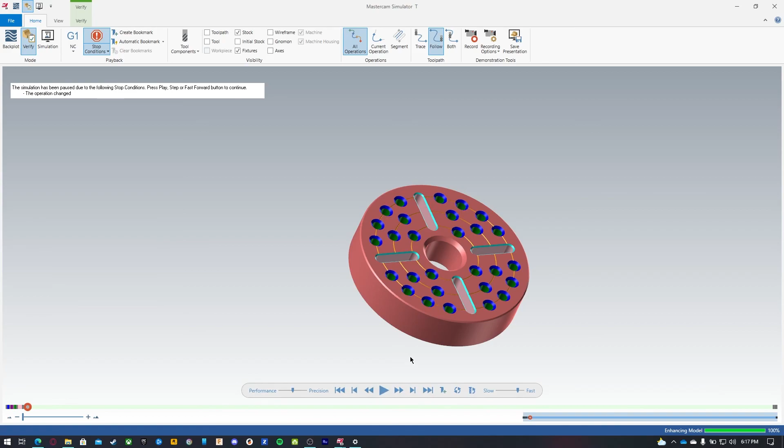So if we run everything, starting on the back side, we spot drill and tap, we do our slots, countersink our slots, and then do our engraving. Then we can flip it over to the other side, and now we pocket this out. Then we do our finish pass for our pocket, and then do our chamfers, clean out the inside bore, and now we do our thread mill.

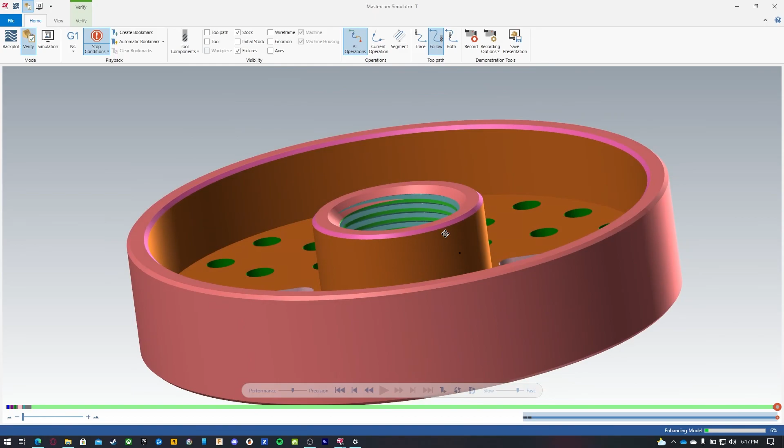With Mastercam 2022, you can see that the threads are actually put into the part. So there's our finished part. We've done both sides, we've done thread milling and transform operations. So I hope this helped you guys. Thanks for watching.